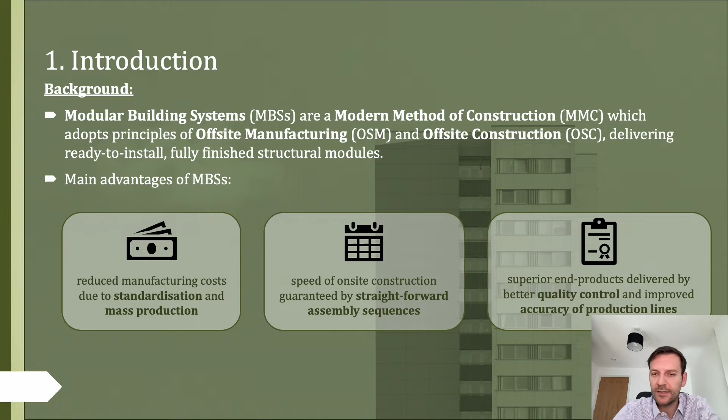Main advantages of MBSs are that they are producing reduced manufacturing cost due to the standardization and mass production, speed of on-site construction guaranteed by the straightforward assembly sequences, and superior end products delivered by better quality control and improved accuracy of production lines.

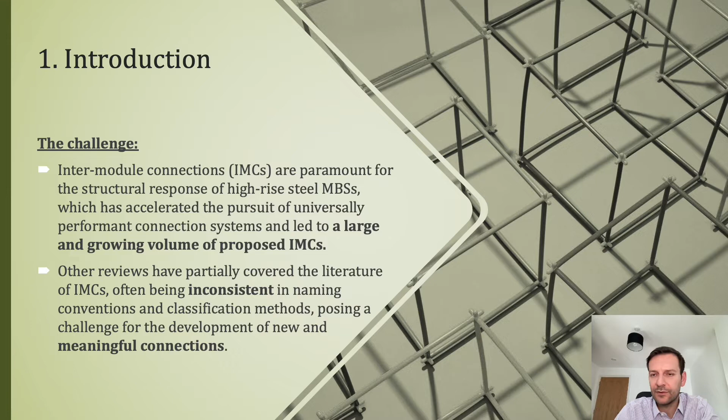Now, while we are doing this review, what is the main challenge? The problem is that in the last years, I would say around 5 to 10 years, there is a large sheer volume of newly proposed connections, and in particular intermodular connections that are presented by researchers, and some of them are also coming from different fabricators. There is also a good number of review papers that have partially covered the literature review of such connections, often being inconsistent though. Consequently, the aim of the present study is to provide a harmonized overview of the existing literature by proposing a unified nomenclature and a systematic classification based on the method of joining.

The main outcomes of this work are the consistent classification and the unified naming convention, the scalable classification system, which will help engineers and researchers to adopt those connections and use them, and of course further expand in the future by adding more connections or more systems, as well as the key areas of improvement revealed by this multi-attribute ranking system. So again, it helps with the decision making.

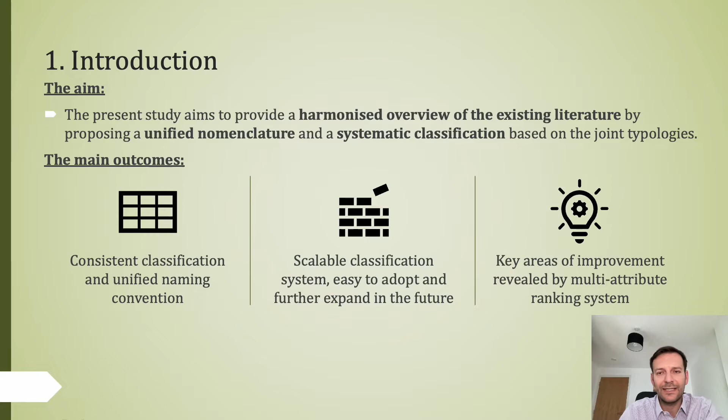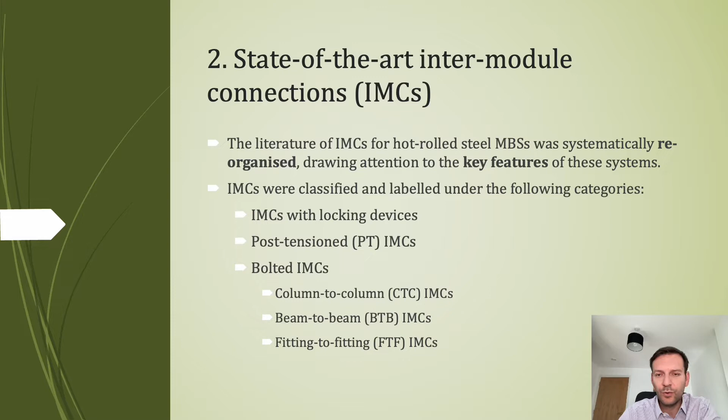The literature of intermodular connections for hot-rolled steel MBSs was systematically reorganized herein, drawing attention to the key features of these systems. The connections were classified and labeled under the following categories. We have the connections with locking devices, we have the ones that have post-tension members and rods, and we have the bolted connections, and because there are quite a lot of them, we categorize them in column to column, beam to beam, as well as fitting to fitting connections.

First category, connections with locking devices: 7 innovative connections were identified, and these joints used either tool-driven or gravity-actioned mechanisms. First one is a twist lock, then you have these interlocking grooves. The third one is a rotary device and screwed nut, self-locking plug-in device, a torque-activated pin device. The last two are self-locking spring-activated tabs, and the last one, I believe, is with sliding blocks.

So you can see that these are kind of mechanical connections where there is either a tool or a kind of a device that is creating that interlocking system. Quite sophisticated and very interesting to explore more.

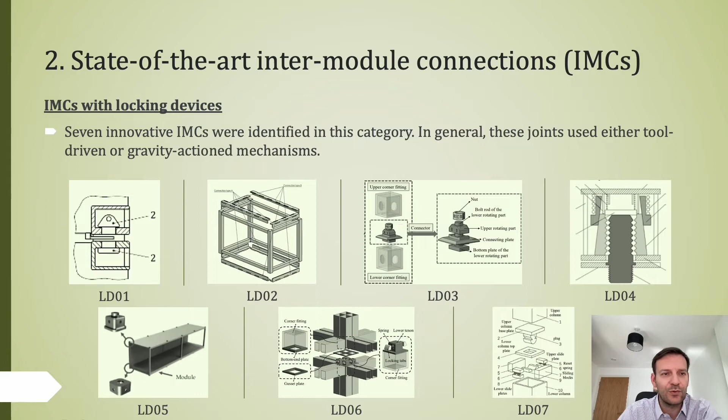In the second category, we have the post-tension PT intermodular connections, which consist of rods inserted through hollow sections, which are continuous through the full length of columns. When necessary, bar continuity was ensured by couplers or sleeve nuts, while nuts tightened the rods to connecting plates, which could also enhance the shear force transferring by various types of shear keys.

We identified 6 of these connections, and you can see they all have rods passing through the middle of the sections. They are enhancing a lot the tensile capacity of these volumetric systems. So if we have, for instance, tall buildings subjected to lateral drifts and there is a lot of tension force, these cables are holding all the volumetrics down.

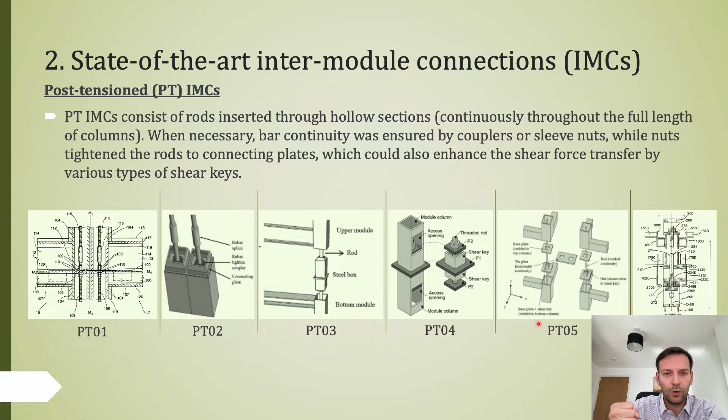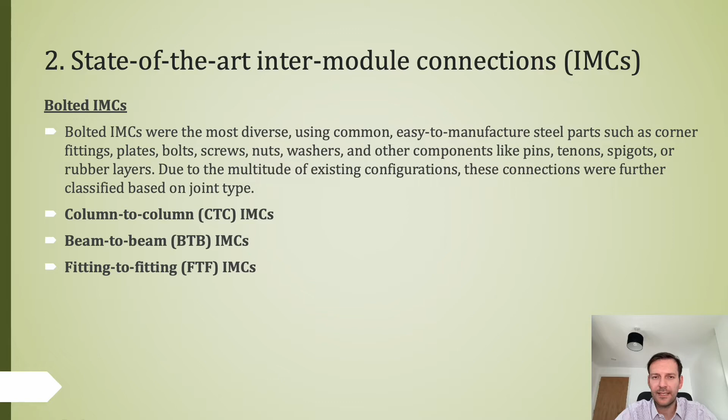Last category are the bolted connections, which are the most diverse, using common, easy to manufacture steel parts such as corner fittings, plates, bolts, screws, nuts, washers, and other components like pins, tenons, spigots, and rubber layers. So these are more advanced.

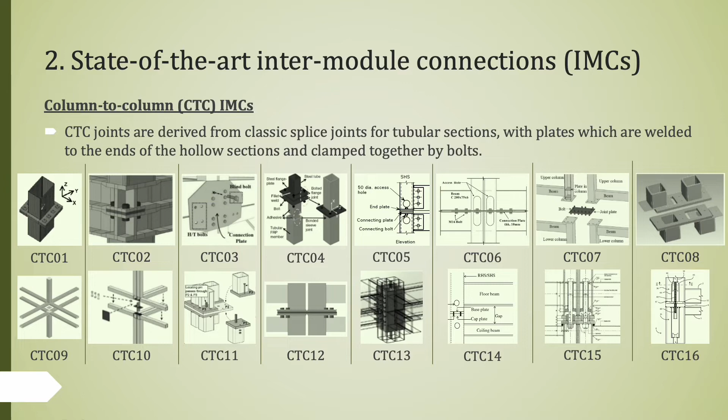The next one is beam-to-beam connections, which are made of gusset plates of various geometries, engineered to closely fill the gaps between modules and optimizing the unusable space between each of the floor and ceiling cassettes. Here we see different types of connections. We have bolts in horizontal as well as vertical directions.

BTB01 is a cruciform plate, BTB02 is a connector plate, BTB03 is a gusset plate, 04 bolted intermediate tenon plates, 05 cruciform socket shaped tenon, 06 is a plug-in tenon device, 07 is interpenetrating tenon devices, 08 is a cross-shaped plug-in connector, 09 is a plug-in bolted adapter with spring pins, number 10 is bolted gusset plates, number 11 is using plug-in tenon and high-strength and blind bolts, number 12 is bolted PFC double beam.

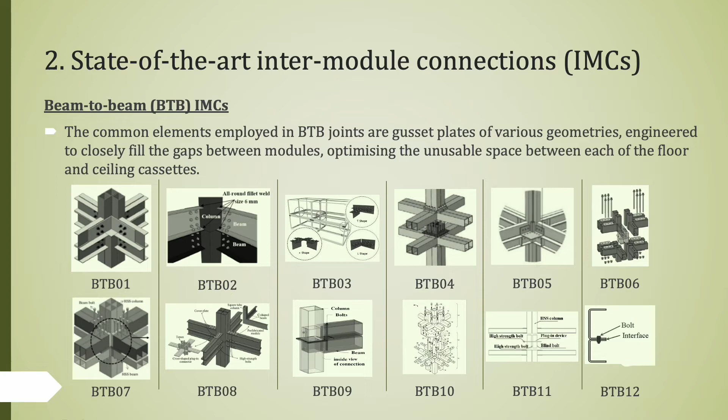So we see that they vary quite a lot. The most interesting thing here is that this kind of intermodular connection is more appropriate for component-based modular construction rather than volumetric-based.

The third category under the bolted joints is the fitting-to-fitting FTF connections, which stems from the common feature of engaging modules through corner fittings. The shape of these cast corners ranges from the classic ISO design adopted from shipping containers to more refined and computationally optimized topologies. We've identified 19 different FTFs, starting with the first one, which is steel hollow cube bracket, and the second one an intermediate plate.

The third one has gusset plates and locating pins. Number 4 has tie plates and spigots. Number 5, tie plates and twist locks. Number 6, rubber isolator and steel clamps. Number 7 is a transverse clamp. Number 8, cross-shaped clamp. 9 is X-shaped clamp. Number 10 is bolted corner fittings. 11, square pipe blocks with internal circular pipes.

Number 12, gusset plates and locating pins. Number 13, bolted corner fittings. Number 14, vertical bolts through columns. Number 15, corner fittings with internal threaded aperture. Number 16, corner fittings with rubber isolation, and that's one of the connections that we're studying quite a lot in our group.

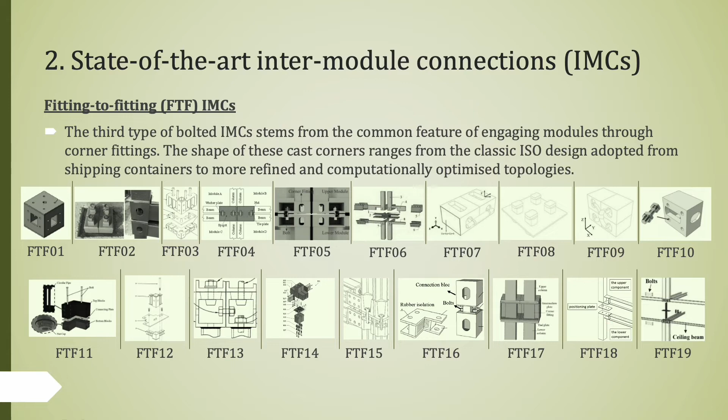Number 17, bolted end plates and intermediate plates. Number 18, external bolts and positioning plates. Positioning plates are used quite a lot. And number 19, cruciform plate and horizontal bolts.

After this extensive literature review, we developed a multi-attribute ranking system for the intermodular connections for hot-formed modular building systems. The scoring system was based on 3 core criteria: the structural, manufacturing, and constructional performance attributes. In the lack of consistent quantitative data from different papers and review works, a qualitative approach based on visual inspection combined with engineering knowledge and intuition was adopted for the characterization of the connection systems.

It is worth noting that having about 60 different connections, we have a very good sample, and we believe that our ranking is pretty accurate and reliable. Through the scoring metrics proposed herein, a practical, comprehensive, and scalable multi-attribute ranking system was achieved, which could be used to help researchers as well as practice engineers as a decision-making tool.

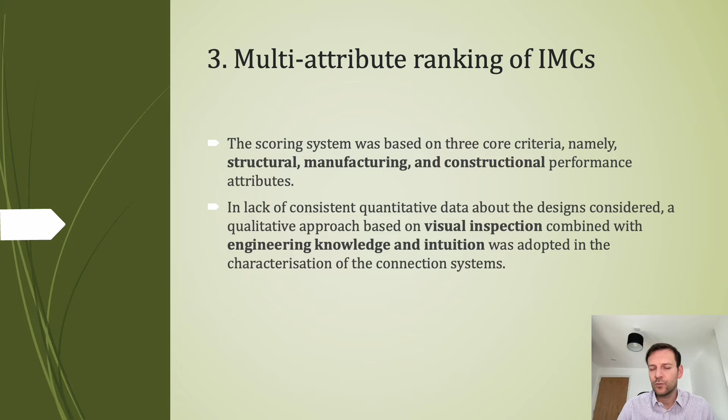Metrics for the structural were the vertical and horizontal connectivity, the ability to provide both vertical and horizontal load paths, the design resilience, in other words, the ability to mitigate or completely avoid permanent damage in the members of modules, and the design flexibility, in other words, how easy it is to adapt or scale connection configurations for more than just one application.

In terms of the constructional attributes, the metrics were the design for assembly, the DFA, as it is well known, which is practical and accessible joining operations that require low to moderate human intervention. The design for disassembly, DFD, the ability to allow fast and intuitive reverse engineering, and the tolerance control, TC, which is the ability to accommodate built-up or construction tolerances without jeopardizing the aesthetics and the structural integrity.

In terms of manufacturing, joint complexity, JC, is the level of detail and regularity of the connection. Ease of integration, EI, complexity of in-shop fabrication and processes required for delivering the final connection part. And the ease of pre-assembly, EP, which is the complexity of required in-shop assembly procedures.

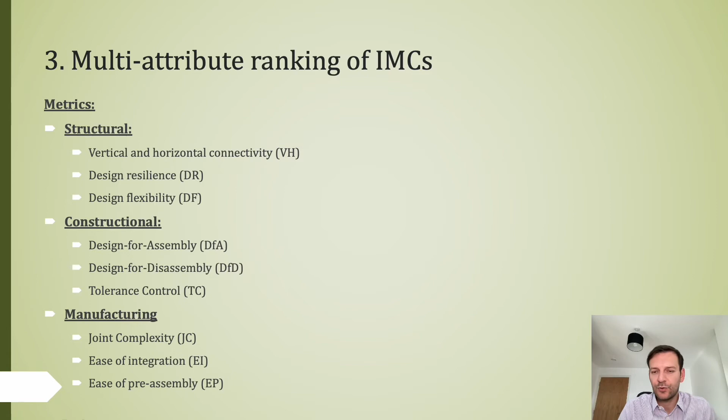The proposed multi-attribute ranking presented here was used to determine the highest scoring connections for each performance category, revealing the most promising per attribute as well as the best performing system for each type of connection. The discussion focused on the highest overall scoring, so how the bar is added with all the scores together, and their bespoke characteristics, while complete data plots scoring methods for each metric are available in the full review journal paper.

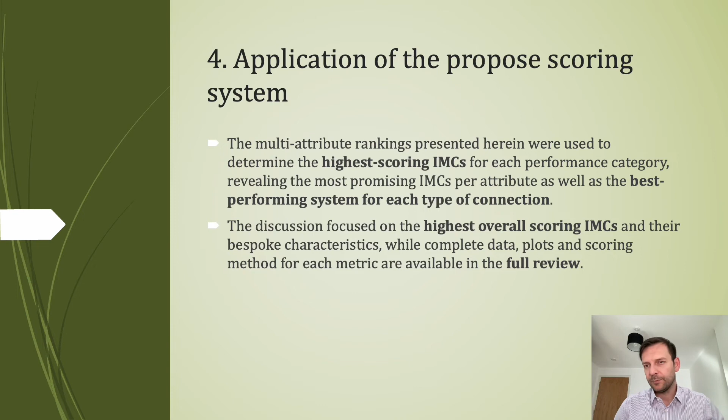Here you can see the synopsis of the results with the 8 best performing connections. The highest scoring systems were the FTF06 and FTF11 joints with totals of 21 points each. The FTF06 scored best in metrics such as DR, DF, DFD, and TC due to its flexible, resilient, and demountable configurations. The only improvements could be reducing the number of bolts, which require on-site tensioning, while manufacturing complexity of the lead rubber bearing may be mitigated by using a high damping rubber bearing instead.

The next 4 joints were the FTF19, 12, 03 and BTB09, coming second with totals of 20 points. These joints displayed well-balanced scores for all metrics, demonstrating robust joints which could be improved in terms of resilience, reuse opportunities, or complexity of fabrication. And the next 2 connections scored 19 points, each achieving medium scores in almost all metrics.

The CTC11 system highlighted the efficiency of common and easy to manufacture features such as interlocking pins and bolted end plates, while adding means of energy dissipation and damage control would help improve its resilience and demountability. Connection CTC12 had an efficient configuration made of common parts with good energy dissipation provided by the rubber layers, yet the inclusion of self-aligning features and mitigating the difficulties in repairing or replacing the damaged end plates after an earthquake could be considered for improving its structural and constructional metrics.

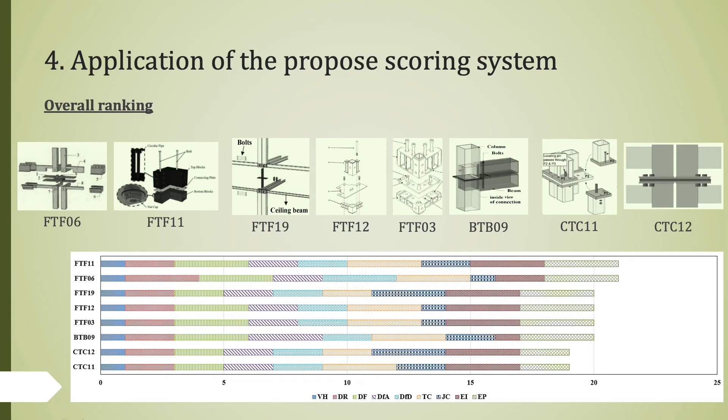In the end, it must be noted that the purpose of the ranking discussed above was not to suggest that one connection would be better than all the others, as there is no fit-for-all solution in multidimensional problems like this one. As the discussion demonstrates, the proposed framework is useful in revealing key features which make efficient designs, both in terms of structural, constructional, and manufacturing aspects, while it also uncovers areas which require improvement, serving as a good starting point for future research directions.

So the concluding remarks of this comprehensive literature review study, with the classification and the further multi-attribute system that was developed, are that this study provided a harmonized overview, for the first time, of the relevant literature, having reviewed, classified, and indexed 60 connections using a unified nomenclature and a systematic and consistent classification system based on joint typology. A new multi-attribute ranking method was developed using a qualitative approach which can facilitate future designs as well as enhance existing connections in low-scoring areas, serving as a useful decision-making tool for both researchers and practitioners.

The multi-attribute ranking system revealed that the use of corner fittings, bolted joints, self-aligning or locating parts, and damage control devices were all must-have features for connections with all-round performance, so we suggest them to be added in most of the connections. And finally, more focus should be put on addressing the hindered demountability and reuse operations caused by the lack of seismic resilience. It's a topic that is extremely interesting for us in our 3D MBC group.